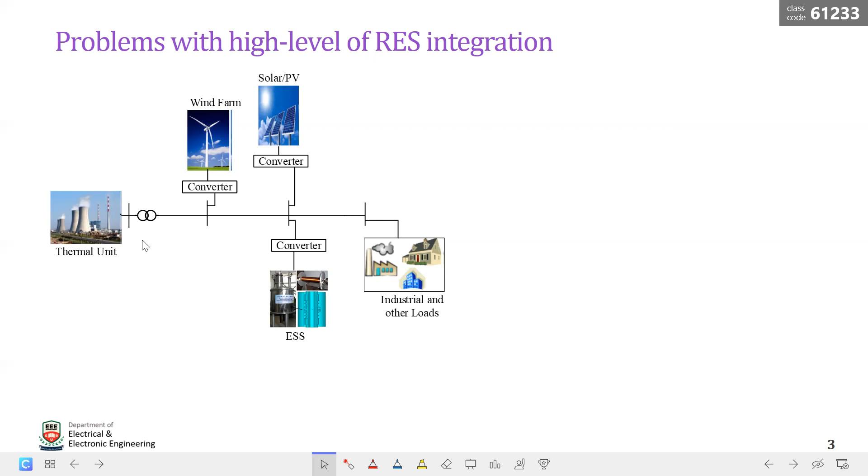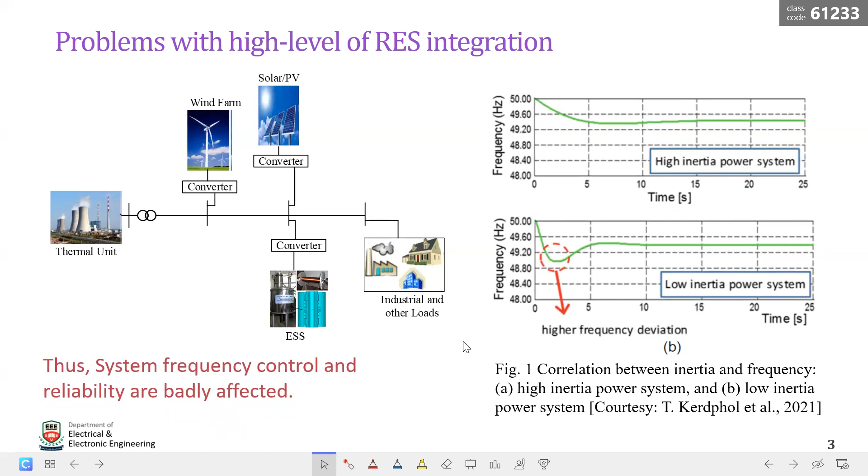Since the system frequency is directly linked to the system total inertia, the renewable integrated system frequency control is badly affected. In the face of a small disturbance, a large frequency deviation will result. Also, the rate of change of this frequency deviation will be higher. That will trigger the under frequency relay, and that can provoke the separation or tripping of sensitive loads and generators. Thus the system frequency control and reliability are badly affected.

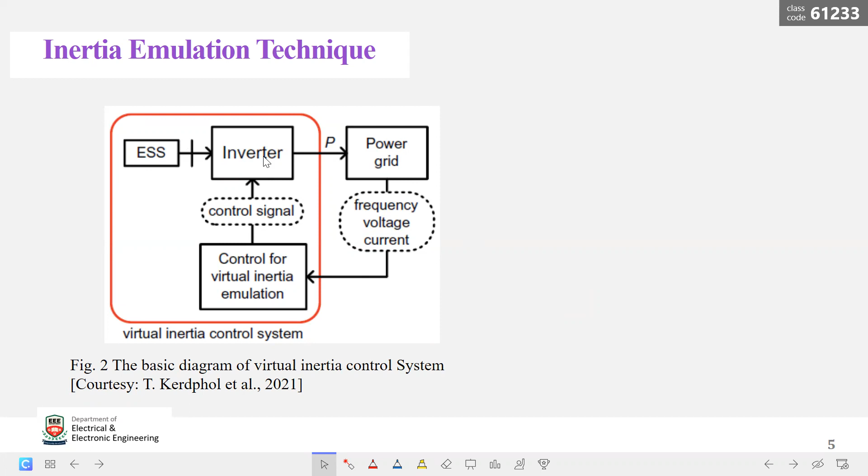For the mitigation techniques, several have already been proposed in the past, such as the auxiliary load frequency control technique, inertia emulation technique, deloading technique, droop technique, and energy storage based systems. Out of these, the inertia emulation technique is considered the most effective one, and it is also considered that it will be an integral part of the coming converter-based renewable systems. In the inertia emulation technique, inertia is virtually supported to the grid through energy storage and the inverter system through a proper control system.

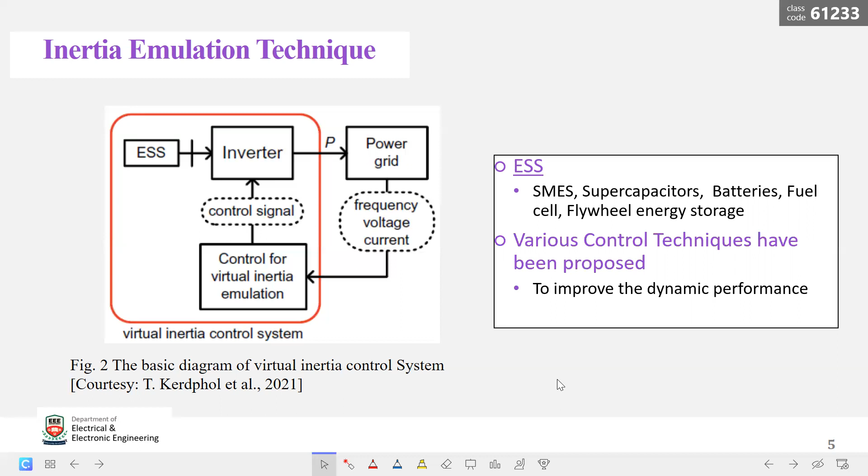Different types of energy storage systems have already been proposed, like superconducting magnetic energy storage, supercapacitor, battery, fuel cell, and flywheel energy storage systems. And most of the work has been focused on the control techniques. Different control techniques have been proposed, both linear and non-linear, to improve the dynamic system performance. In this work, I am also proposing an improved control system for improving the system dynamic performance.

The system we consider is called the two-area system, where in each area there is a thermal unit, solar PV, industrial loads, and the energy storage system. The frequency deviation signal from each area is collected at the control center, and the tie line power deviation is also collected at the control center. This control center provides the appropriate control signal to the controller for the required control action.

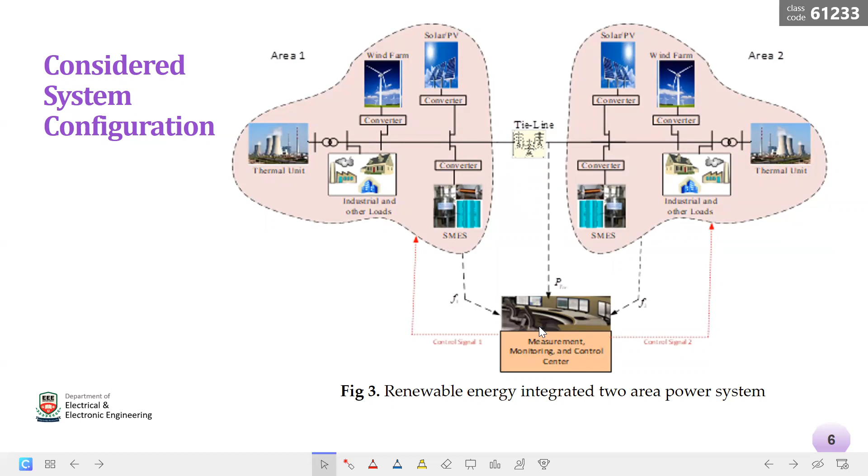For the system dynamic modeling, an adequate model has been considered for each component with the required consideration of constraints like deadband control, GRC, GDB, all these things. And for the wind and solar, their variation is created through white noise.

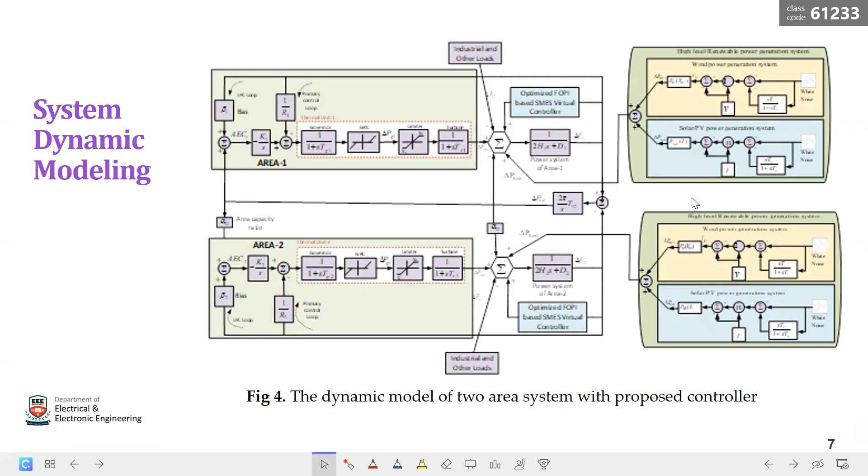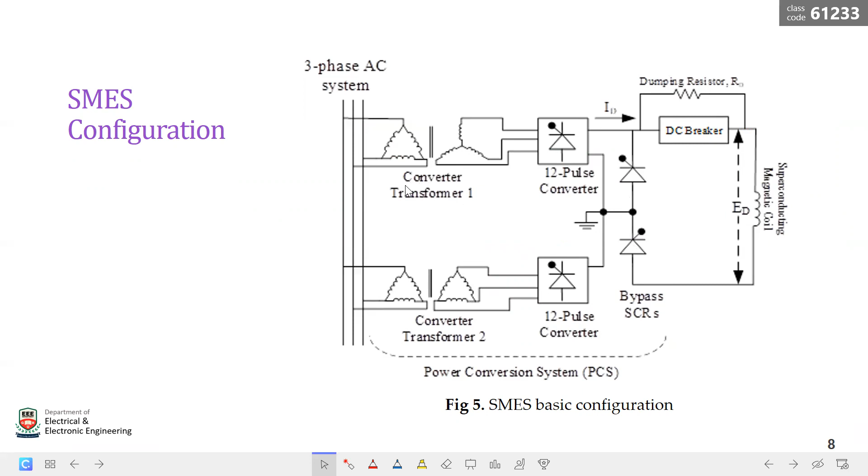For the energy storage system, we have considered here SMES, a superconducting magnetic energy storage system, which is modeled as a superconducting coil and a DC resistor. The interaction of the SMES and the grid is through the converter and the transformer. That is, the SMES exchanges power through this converter and transformer with the grid. For the dynamic modeling and controller design, the SMES system is modeled with the standard model.

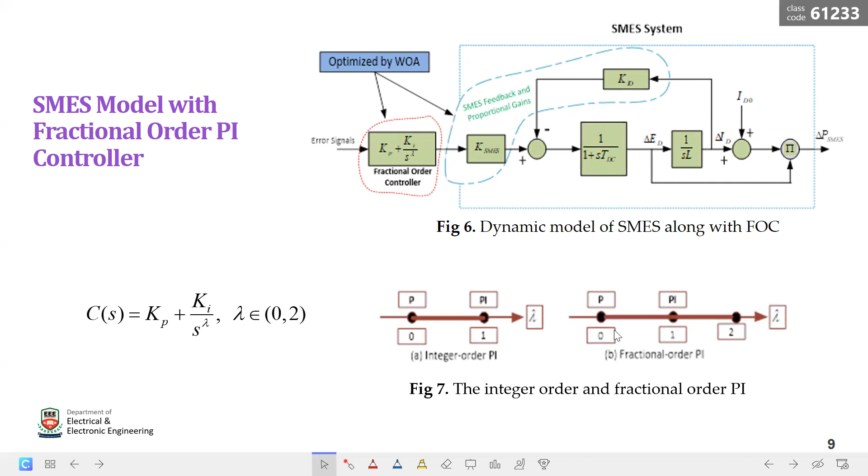For the integer controller, lambda has only two distinct values, either 0 or 1. If it is 1, it will form a PI controller. If it is 0, it will form a P controller, or proportional controller. But for the fractional order controller, since lambda could be any value between 0 and 2, it gives the freedom for infinite tuning for better performance.

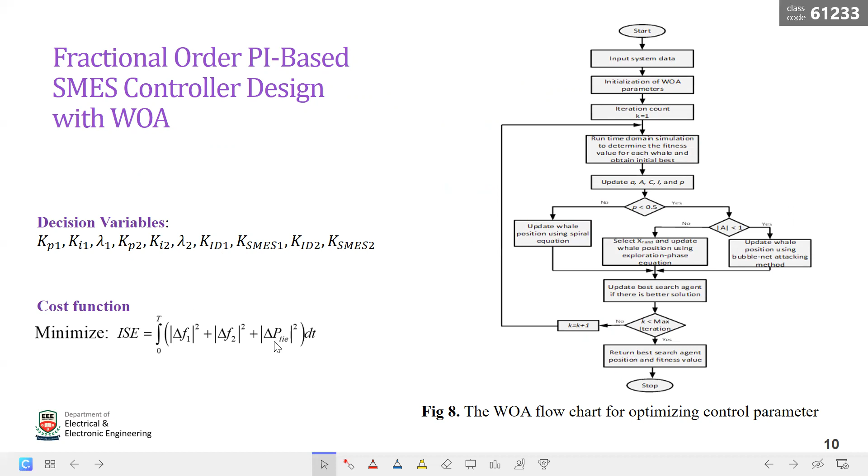And the controller parameters are optimized through the whale optimization algorithm. Altogether there are 12 optimization parameters, and for the cost function we are considering the frequency deviation in each area and the tie line power deviation.

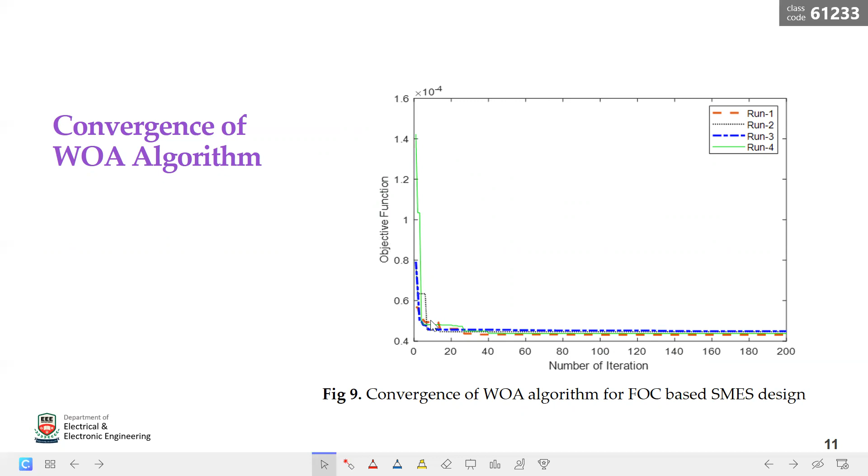So here is the convergence of the whale optimization algorithm. It shows that the objective function is converging within 30 iterations in each case. So that gives the indication that this algorithm is insensitive to the initial value and it is quite robust.

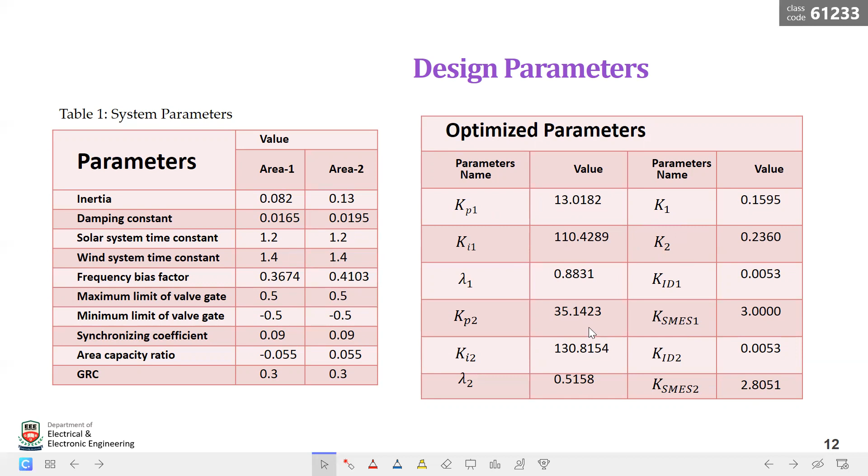So these are the system parameters for area 1 and area 2 that are used for this optimization. And these are the optimized parameters, 12 optimized parameters received from this optimization algorithm. These optimized parameters and the system parameters are used for the dynamic simulation of the system to test the performance of the controller for different scenarios like light load variation, heavy load variation, solar and wind power variation, and reduced inertia of the system.

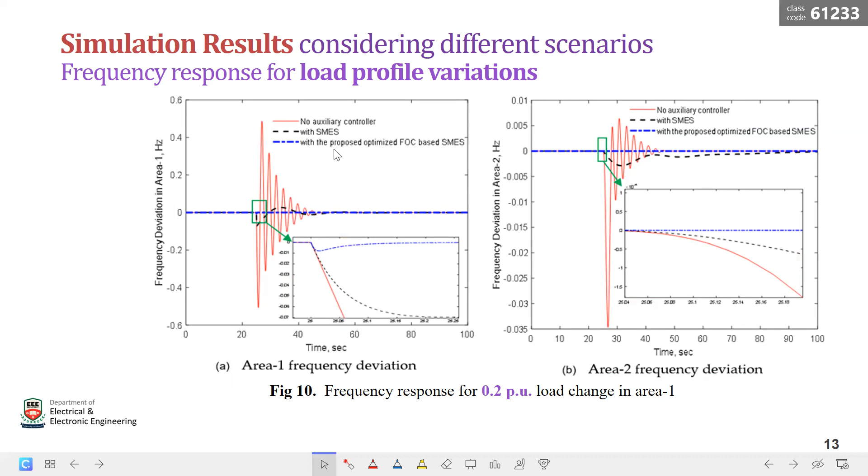And with the conventional controller, the performance is quite better, quite acceptable. But with the proposed fractional order based superconducting, that is with the proposed controller, the performance is much better than the conventional controller for both area 1 and area 2.

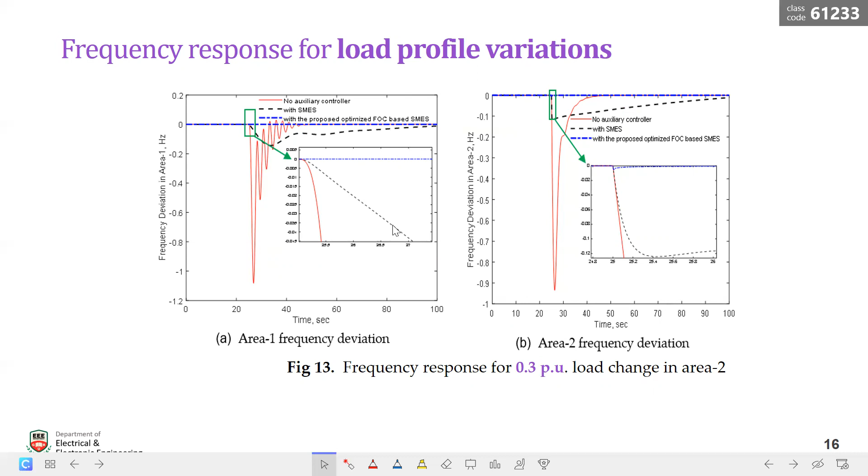So this is the frequency response for a step load change in area 2, that is a 0.3 step load change. We can see again that the proposed controller is giving a much better response than the conventional controller.

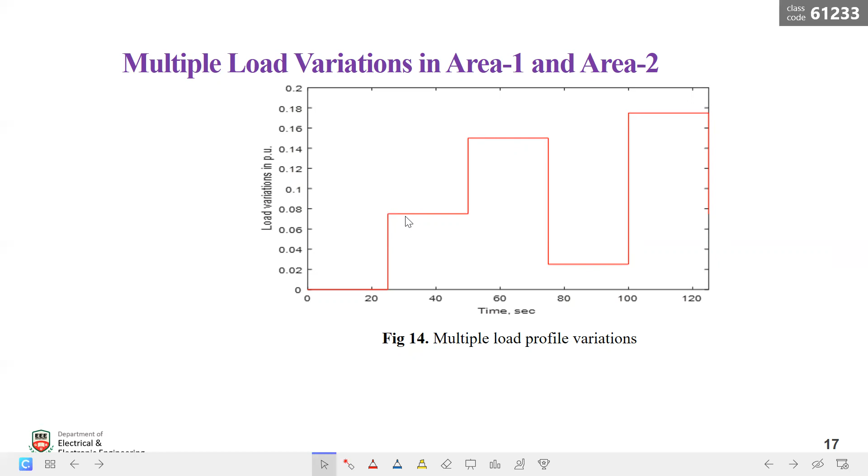The proposed controller was also tested with multiple load variations to see how the controller responds to multiple disturbances. That means if a subsequent disturbance is coming, how it will handle it, or whether the system frequency deviation reaches 0 before the next disturbance comes. So we apply this kind of disturbance to area 1 and see the frequency response for area 1 and area 2.

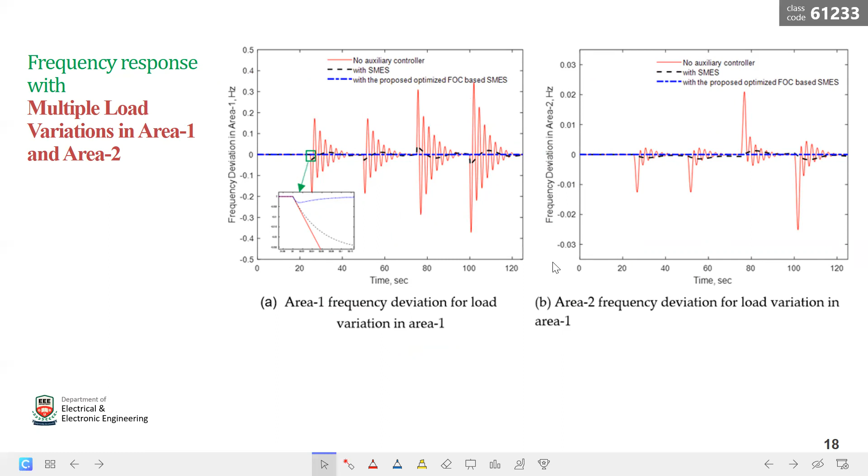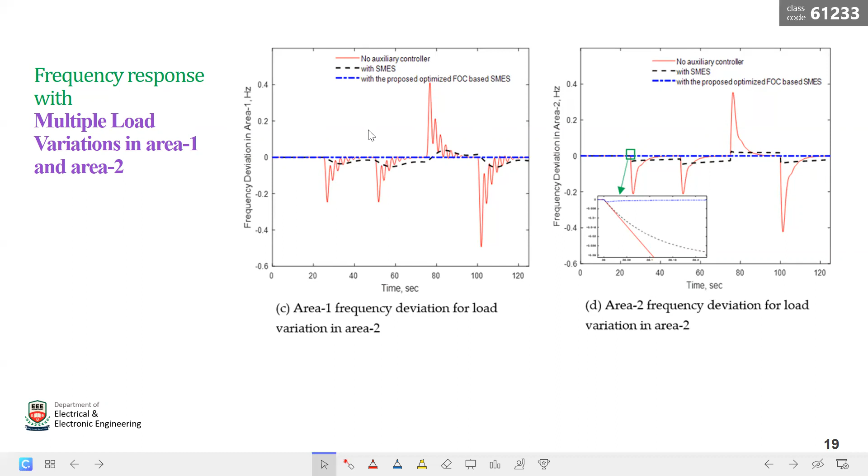And similarly, if we apply this kind of multiple disturbance to area 2 and look at the frequency deviation response in both area 1 and area 2, we can again see that the proposed controller is giving a much better result.

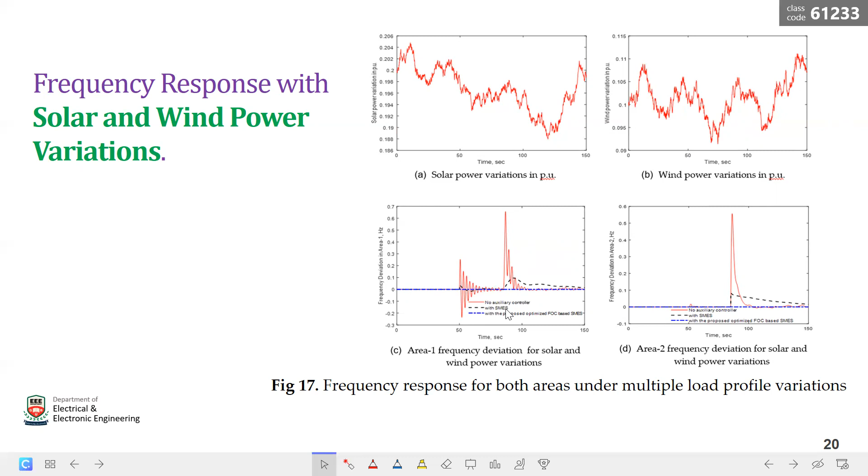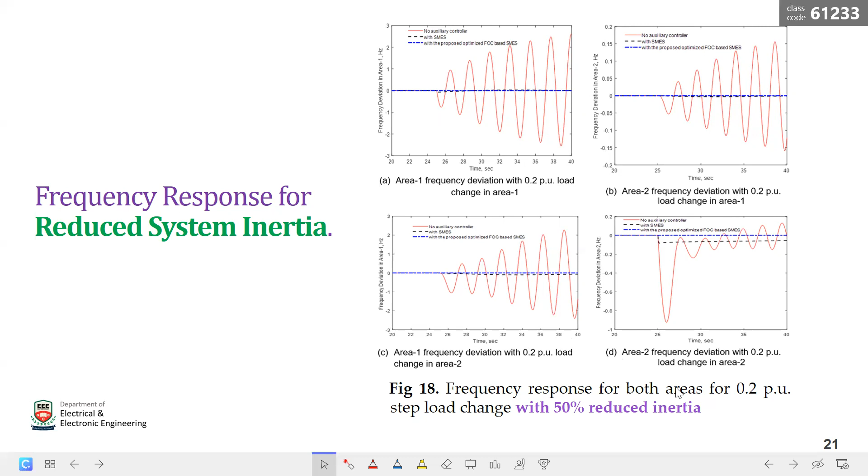So in conclusion, an improved load frequency control technique for low inertia power systems is proposed. The inertia of the system is supported virtually. The system frequency deviation is greatly improved. It is also robust against parameter variation. It provides improved response with regard to overshoot, undershoot, and settling time. The proposed approach endorses green efforts to augment sustainability.